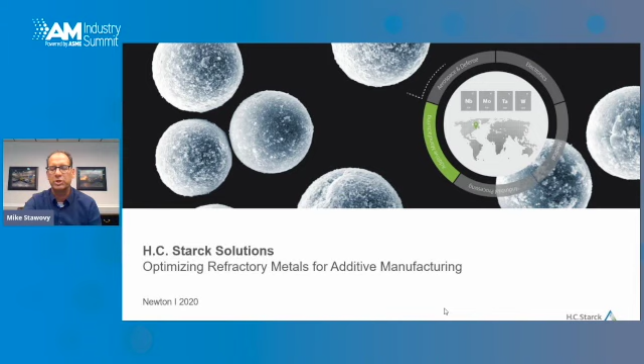I want to first start off with a quick introduction about Starck. If you're not familiar with us and you're not familiar with refractory metals, I thought it would be good to give you a little bit of an introduction on the company.

Starck Solutions is a now 100-year-old company. Our company was founded in 1920 in the heart of Germany, so this year we're celebrating our 100-year anniversary. We're a supplier of fabricated products, metal products, into growing industries such as electronics, aerospace, medical, additive manufacturing, as well as industrial processing. And we're a global company.

We have locations around the world, 6 manufacturing facilities, and about 650 employees. We're a conscientious company. We're about sustainable materials and responsible sourcing of those materials from conflict-free countries. We're an industry leader in terms of supplying, being a top 3 provider to all of our relevant markets. And we're also a supplier not only of metal parts, but also metal powders for applications such as additive manufacturing.

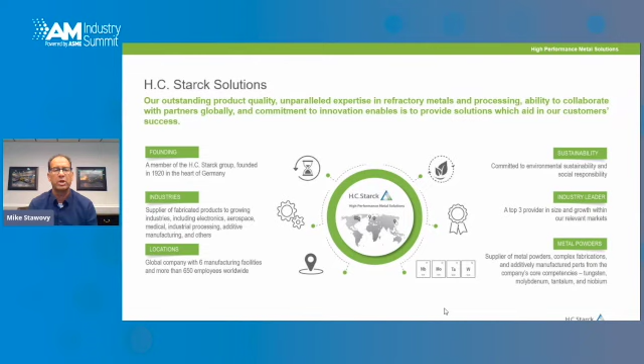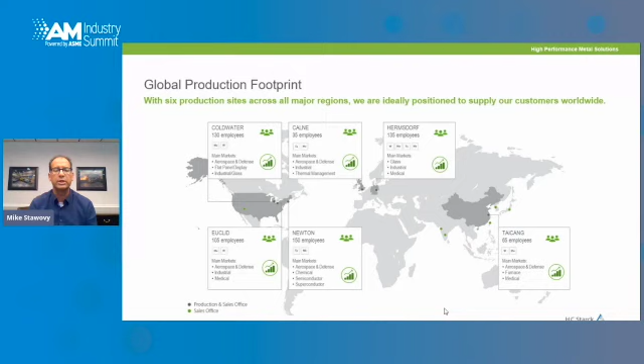Our global footprint is scattered across both North America, Europe, and Asia, and that allows us to supply refractory metal parts to different regions locally within our different factories.

We cover a wide range of the value chain for refractory metal parts. We purchase chemicals from mining operations, and we're able to then process those chemicals into refractory metal powders using thermal reduction. We can also convert those powders to spherical forms suitable for additive manufacturing using spray drying or atomization technology, spheroidization techniques.

We can then take those powders, we can consolidate them using a variety of melting or powder metallurgy techniques that allows us to produce ingots, billets, or now using additive manufacturing to consolidate those powders into metal parts.

In our more traditional processing, we do quite a bit of thermomechanical processing via rolling, extrusion, or forging that will convert our refractory metal materials into bar, rod, wire, plate, sheet, and foil.

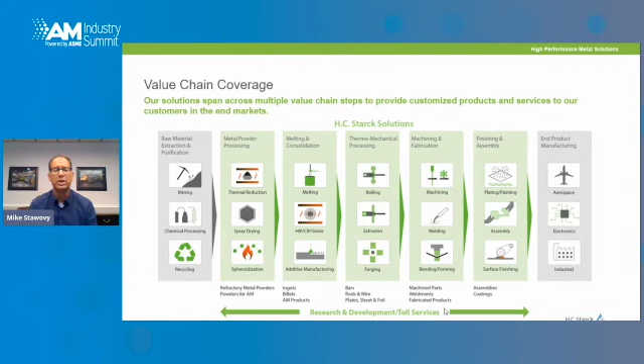And then there are downstream processes including machining, welding, fabrication, forming, plating, assembly, and surface finishing of refractory metal parts that then go to our end customers in aerospace, medical, electronic, and industrial applications. And we support all of these different processing steps with R&D and toll services for refractory metal applications.

In terms of our materials and some of the properties that I think are a good introduction for folks that may not be familiar with refractory metals, we're talking primarily about 4 main metals: molybdenum, niobium, tantalum, tungsten, and their alloys. Most people would think about refractory metals in terms of high temperature mechanical properties as what's most important, but there are many other interesting properties for why people select refractory metals.

You can have a wide density range, from 8 to 19 grams per cubic centimeter. These materials are great at blocking radiation, so there are applications for radiation attenuation. Some of these materials are quite biocompatible, so there are applications as biomaterials for implantation or other bio applications. Some are very corrosion resistant in applications with concentrated high temperature acids, molten metals, or molten salts. They have low coefficients of thermal expansion, high thermal conductivity. In some cases, they inhibit diffusion as a barrier layer, and they also have very high elastic modulus.

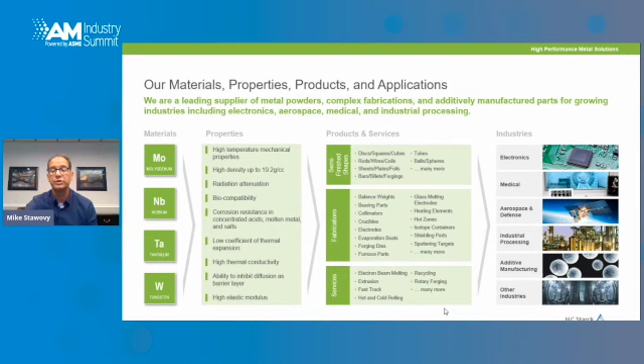As a result, there's a wide range of products that can be produced from these refractory metals, serving industries such as electronics, medical, aerospace, defense, industrial processing, additive manufacturing, and other growing industries as well. So I wanted to talk now about our additive manufacturing approach for these materials.

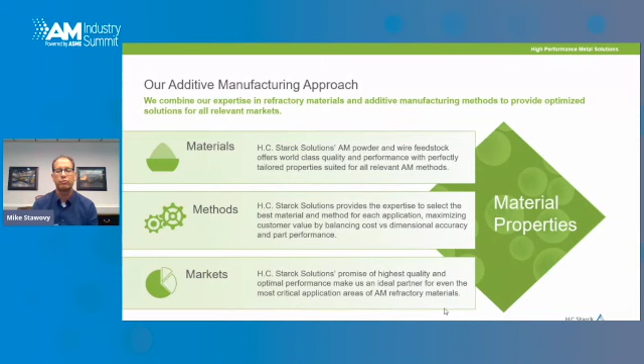Because of our 100-year history in understanding refractory metals, we really understand the metals and the processing and the material science of these materials. And because we understand what materials might be able to be processed via powder metallurgy versus a melting technology, we've tried to apply different additive manufacturing methods to these materials, and we try to look at the individual markets and the applications that our customers might have for these materials and apply the right match of material and printing method to that end market application that meets all the material properties for any given customer request.

Some of our key activities that we've been doing in additive manufacturing are three main areas of focus.

We've been doing a lot of work in powder development, process development of producing refractory metal powders and alloy powders suitable for additive manufacturing, and then trying to develop the right mix of properties suitable for any given printing technology, whether it's particle size distribution or chemistry, trying to make those suitable for AM.

We've done a lot of strategic partnership with research institutes to try and build good parameter development studies on different AM platforms for refractory metals, and those include technologies such as powder bed fusion, directed energy deposition, binder jet printing, and 3D screen printing.

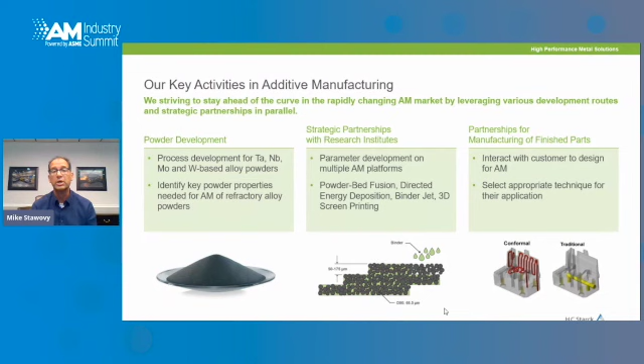And then we've partnered with other manufacturing companies and customers that can help us understand what kind of applications they have, and how we might be able to apply additive manufacturing to improve the performance of their given application.

So if I want to focus on some of these key areas, I'll start with the materials and what we can offer in these refractory metals from HC Starck Solutions.

In terms of focusing initially on powders, we can produce the pure elemental powders - niobium, molybdenum, tantalum, and tungsten. We can do these in ways that they have high purity, high bulk density, good spherical morphology, good flow, low oxygen, and the right kind of particle size distribution that fits with the different AM technologies.

But I think something that's unique with HC Starck is we're able to make refractory alloy powders, and I think that's something that's less common in the industry, even in the refractory metal community.

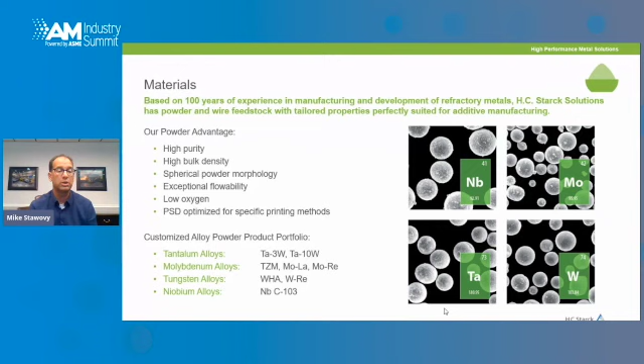So in some cases, we've done printing trials and built parts from alloys such as tantalum with 3 weight% tungsten, tantalum with 10 weight% tungsten, some molybdenum alloys such as TZM, which is a zirconium and titanium alloyed molybdenum material, molybdenum with lanthanum oxide, molybdenum rhenium, as well as tungsten alloys such as tungsten heavy alloy, tungsten rhenium, and a niobium alloy called C103.

If we talk about the methods that we've tested within HC Starck, we've focused on 4 main areas for making metal parts. We have a technique called 3D screen printing that we've worked closely with partners on to develop for printing vertical structures, vertical grid structures.

We've done quite a bit of work with binder jet printing where that makes sense with refractory metals. Powder bed fusion is obviously the most common AM technique, and we've applied that where we think it makes sense for refractory metal materials. And then directed energy deposition, looking at both powder feed and wire feed techniques.

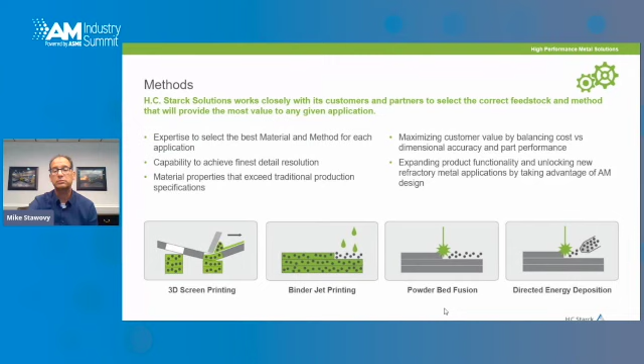And we see within the markets, there's quite a wide range of potential applications for refractory metals, and some areas where we've seen good opportunities that match with refractory metals and AM technology are solutions such as anti-scatter grids for medical imaging, rocket motor nozzles for the aerospace industry, orthopedic, spinal, or dental implants for biomedical, heat exchangers for the chemical processing industry, and tungsten heavy alloy components for defense applications.

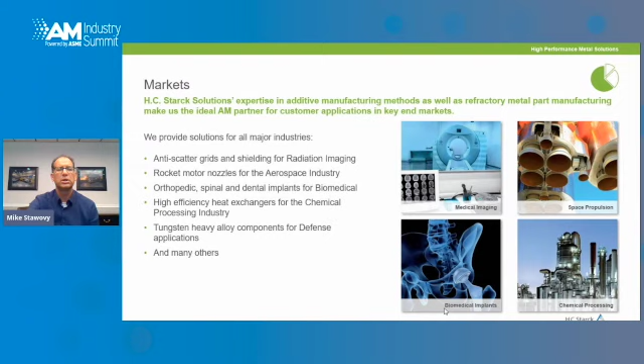I wanted to talk a little bit about some of the challenges of working with refractory metals, just so everyone's aware of some of the challenges of working with these materials.

All of the main metals that I'm talking about - tungsten, molybdenum, tantalum, and niobium - are all BCC, body-centered cubic metals. And so all of these body-centered cubic metals have something called a ductile-to-brittle transition temperature. If you look in the table I show on this slide, the ductile-brittle transition temperature for these metals in the fully recrystallized or as-sintered condition, or say a laser printed condition, is going to be different for each of these different metals.

For pure tungsten, you're going to have a ductile brittle transition temperature that's in the range of about 400 degrees C. And so in the as-printed condition, at room temperature, pure tungsten is going to be quite brittle. And it's the same situation for molybdenum in that fully recrystallized or as-laser-melted condition - it's going to be quite brittle at room temperature.

And with other materials like niobium or tantalum, the ductile brittle transition temperature is below room temperature, so those materials are going to be quite ductile at room temperature in that material condition.

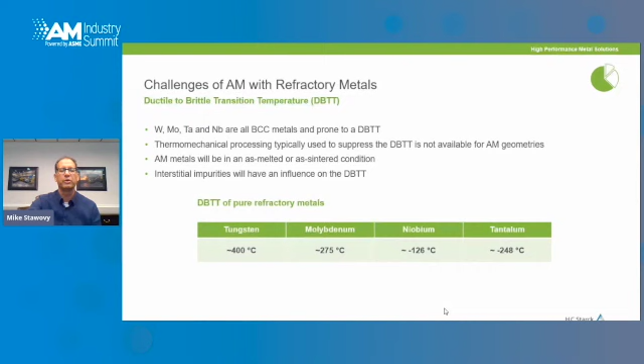The other thing that can have an impact on the ductile brittle transition temperature is that interstitial impurities can increase it. So with any AM technique, you want to minimize things like oxygen and carbon in your material. With traditional processing, using thermomechanical processing such as rolling or forging, you can suppress the ductile brittle transition temperature in these materials. That's what's done with molybdenum and tungsten to drive their transition temperature below room temperature. But that kind of thermomechanical processing is not available with an AM technique, so you need to think a little differently with some of those materials.

Some examples I wanted to share with everyone today are examples we've done internally at HC Starck, but also some data that's been published out there in the literature.

Here's an example of AM of pure tungsten using powder bed fusion laser. There are definitely companies that have been successful printing complex geometries with high theoretical densities using powder bed laser. But all the examples I've seen, and some of our own internal research, have shown that there's a certain level of microcracking that occurs in this material due to thermal stresses upon solidification. Even though you can print it to high density, it will have minimal mechanical ductility. So for pure tungsten, in my opinion, there are only applications for very low mechanical loading situations.

Some of the photos on the left are examples of anti-scatter grids applied in situations with low mechanical loading, where all you're looking for is radiation attenuation within the material. Some examples of the microstructure showing this kind of microcracking are shown in the photos on the right.

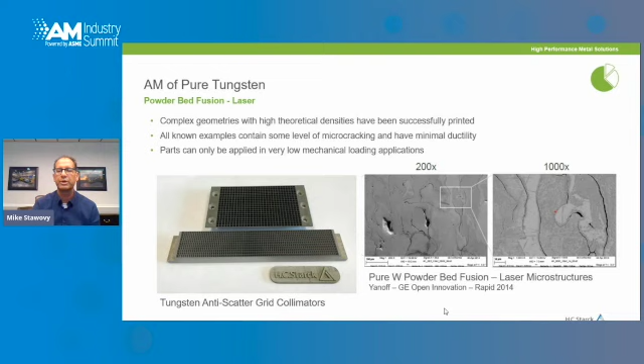Another example is powder bed laser fusion of pure molybdenum. These can also be produced in complex geometries, and we've been able to produce pump impellers, shown on the bottom left, made out of pure molybdenum.

But there are interstitial concentrations that concentrate at the grain boundaries and the weld boundaries. Some of the microstructural photos on the bottom right show cracking that occurs between the weld boundaries of this material. In some cases, the stresses get so high that those weld boundaries can pull themselves apart just due to the stresses upon solidification, as shown in the enlarged photo on the bottom right.

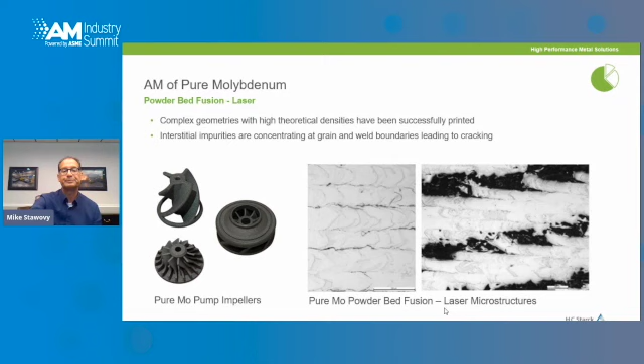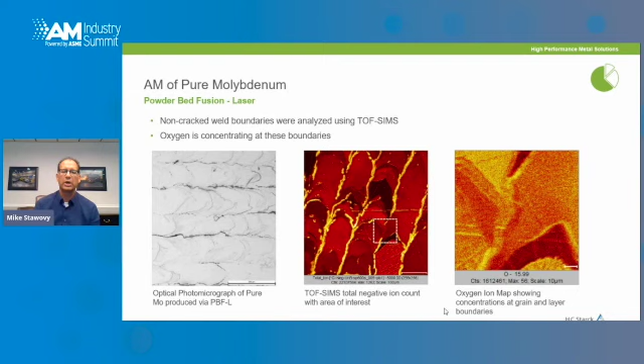So what that means, in terms of strategies for success with refractory metals, I think the key ideas I wanted to share today are: when you work with these materials, you need to use materials that are ductile in the as-sintered, recrystallized, welded condition. To focus on that, you need materials that have a low ductile-brittle transition temperature.

So how do you achieve that? You can definitely work with tantalum and niobium base materials for your laser-based fusion approaches. You can also use an alloying approach - some things we've done at HC Starck include alloy additions that help reduce the ductile brittle transition temperature of molybdenum and tungsten. We've demonstrated that you can add nickel and iron components to tungsten to make an alloy called tungsten heavy alloy, which is a good fit for binder jet printing. You can also do rhenium additions to tungsten or molybdenum to make them more ductile at room temperature in a melted condition.

The other thing you can do is really try to control your interstitial impurities. Some strategies we're looking at involve using getters that can control or remove the interstitial components. So if you add in some reactive metals that can combine with your interstitials, that can help with your mechanical properties.

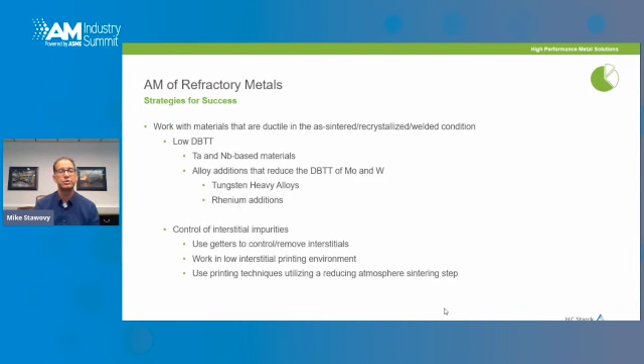You definitely want to work in a low interstitial printing environment. Do everything you can to minimize the oxygen within your printing chamber, whether that's working under vacuum or using really good low oxygen content inert gas. And if you're using a post-process sintering step, utilize a reducing atmosphere in that sintering step to try and minimize these interstitials.

A couple of examples of where we've demonstrated success with these approaches: one example is binder jet printing of tungsten heavy alloys. This is work I published in the International Journal of Refractory Metals and Hard Materials last year. We developed a specific pre-alloyed tungsten heavy alloy powder suitable for binder jet printing. You can see tensile specimens we printed on the right-hand photo. The top bar is in the as-printed condition, and below it you see the sintering shrinkage that occurs in the tensile specimen. We're able to produce full density material that shrinks about 17 to 19%.

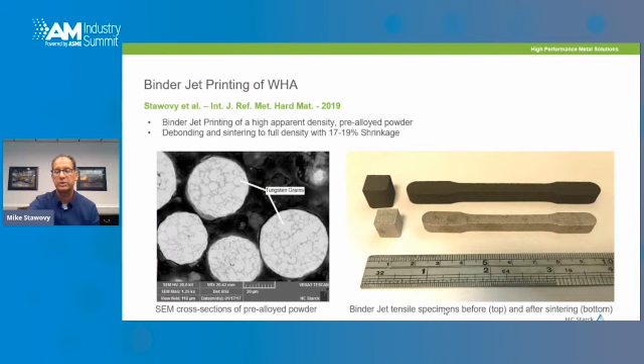If we compare the traditional tungsten heavy alloy to a binder jet printed tungsten heavy alloy, you can see in the microstructures at the bottom of the slide that there's no visible difference between a traditional powder metallurgy tungsten heavy alloy microstructure and one that's been binder jet printed and sintered. We've also met the ASTM specification for tungsten heavy alloy, ASTM B777.

That's shown in the table. We have the specification values shown, as well as material we've tensile tested in the as-sintered condition and the as-sintered and heat treated condition. In both cases, we meet all the requirements of ASTM B777 with this binder jet printed and sintered material. When we add in the additional heat treatment, we see improvements in mechanical properties in terms of tensile strength and elongation to failure.

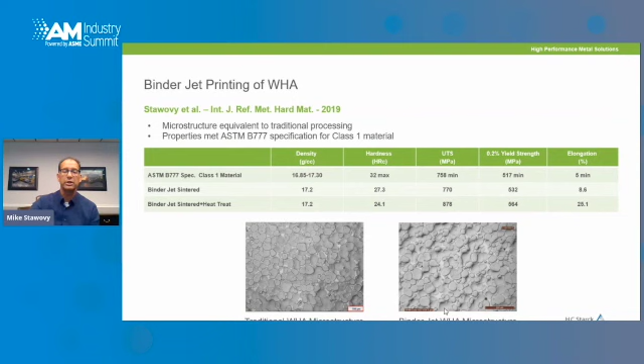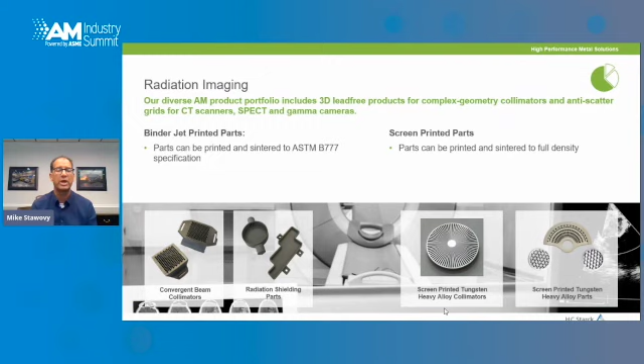Some other examples of success with tungsten heavy alloy: we've shown that we can print convergent beam collimators and radiation shielding parts using a binder jet printing approach. We also have another technique, screen printing, where we've been able to screen print and sinter tungsten heavy alloy components that have a vertical grid structure, shown in the bottom right-hand side. These are typically parts used in medical applications for radiation imaging, such as CT scanners, SPECT, or gamma cameras used for a variety of medical imaging techniques.

On the aerospace and defense side, we've been able to demonstrate and print complicated geometries used in space propulsion nozzles, including some complex resistojet parts printed out of both tantalum and C103. These are cross-sectional views of the parts, and we feel this is a fairly viable approach to improve the space propulsion of some satellites. There are also high temperature applications in aerospace and defense, counterbalance weights, and some missile warheads as well.

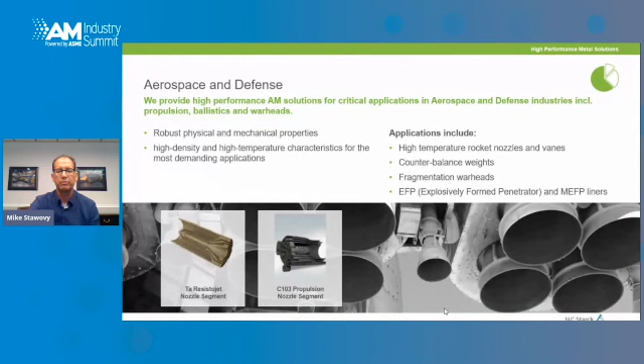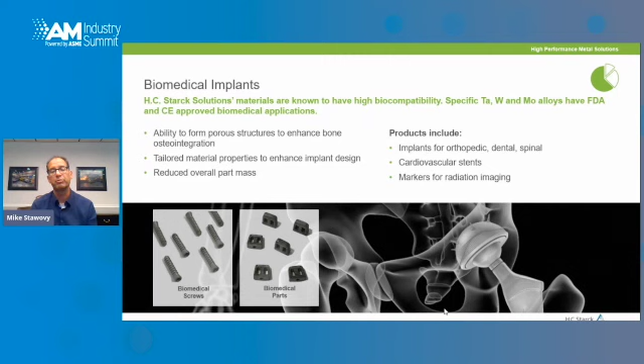Although there's no official FDA or CE approval of 3D printed refractory metal medical implants, there are existing applications where these refractory metals are utilized as biomedical implants in tantalum, tungsten, and molybdenum alloys. With AM techniques, we've been able to demonstrate that we can print porous structures that enhance bone osseointegration and tailor material properties to enhance implant design. There are examples of dental screws and spinal implants we've printed out of refractory metals for this market.

Finally, industrial applications. One of the areas for our tantalum alloys is in highly concentrated acid environments for manufacturing of those products. We feel there are pretty good applications for making things like pump impellers or heat exchangers that would fit those markets and applications.

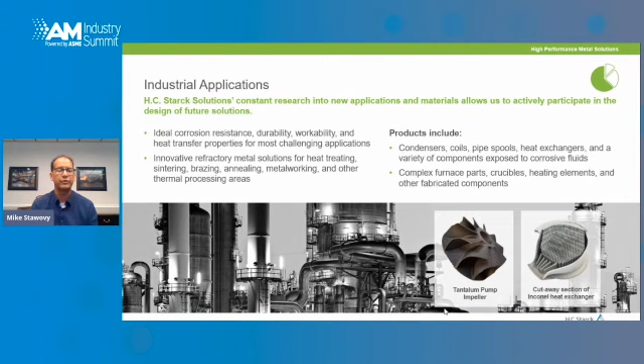So the key takeaways I wanted to share with you today in terms of AM refractory metals: AM techniques tend to produce properties that are similar to as-welded or as-sintered materials.

You need to be conscious of the ductile-to-brittle transition temperature of refractory metals under those kinds of conditions. Thermomechanical processing isn't really an option for complex AM geometries, so traditional routes to reduce ductile-brittle transition temperatures, such as alloying additions, have proven to be a successful alternate path. We're seeing AM methods beginning to be used to produce a variety of refractory metal parts.